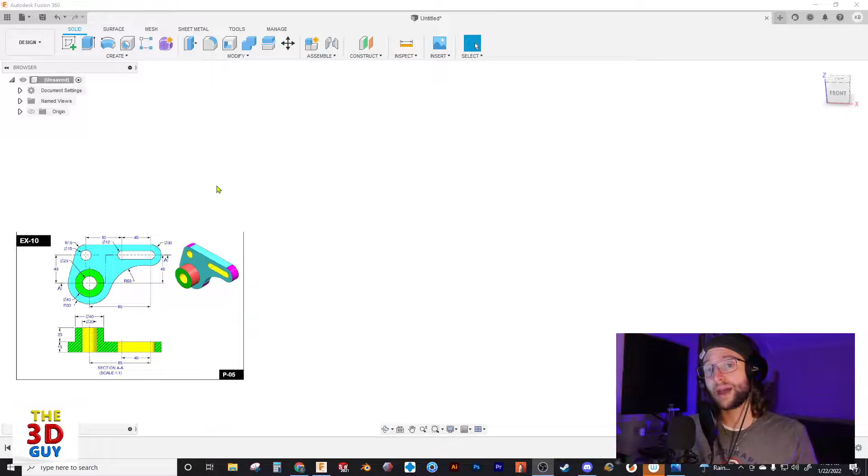Let's just start off from the very basics, which is finding your origin. You always want to be sketching around your origin, based off one of the main features. In this sketch, you can see the green circle, and most of the major measurements are being pulled from that point. So we're going to go into sketch, and I'm going to click front face, that's just my preference, and we're going to go with the circle.

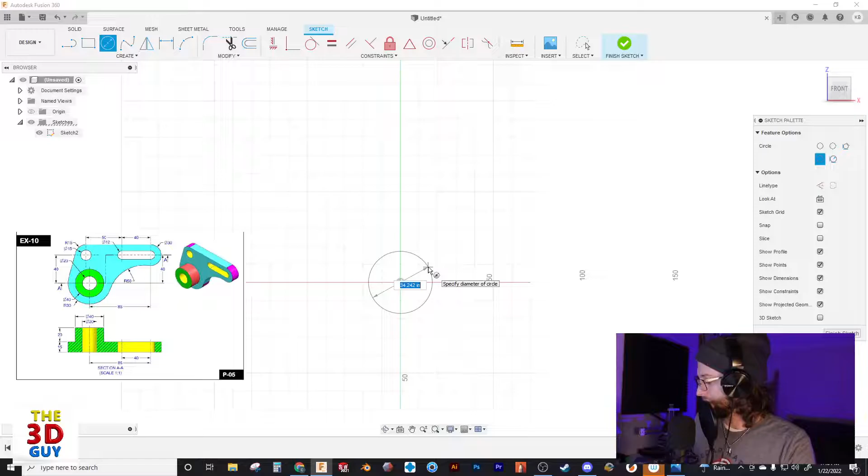One thing I like in Fusion is as you're measuring and sketching things out, you can add your dimensions, and it will count that dimension as a defining dimension. So in this case, let's put in that 20 inches. And it's thinking... there we go. I'm pretty sure all these are actually in centimeters, but it's all scaled, so it doesn't really matter.

We'll do 40. And again, you could also, if you wanted, just click and use your sketch dimensions as well. In some ways I think that's quicker, in some ways I don't. It's really up to you, just more of a preference thing.

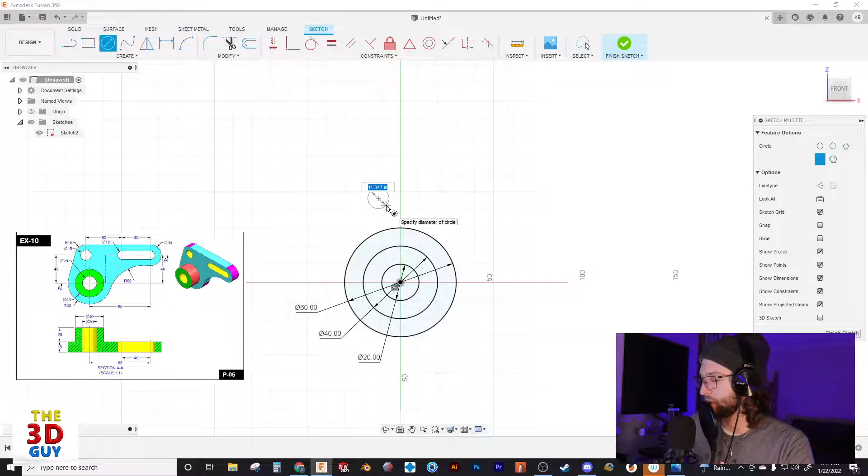All right, so let's move these dimensions out of the way so we can see them and don't get too confused. Then we're just going to add a circle about right here, and we're not going to worry about exactly where it is. This one's 15. Then last, we're going to add a slot.

I'm just going to hover over here and get a reference. And we know that this is 12. All right, next, we have everything put in place.

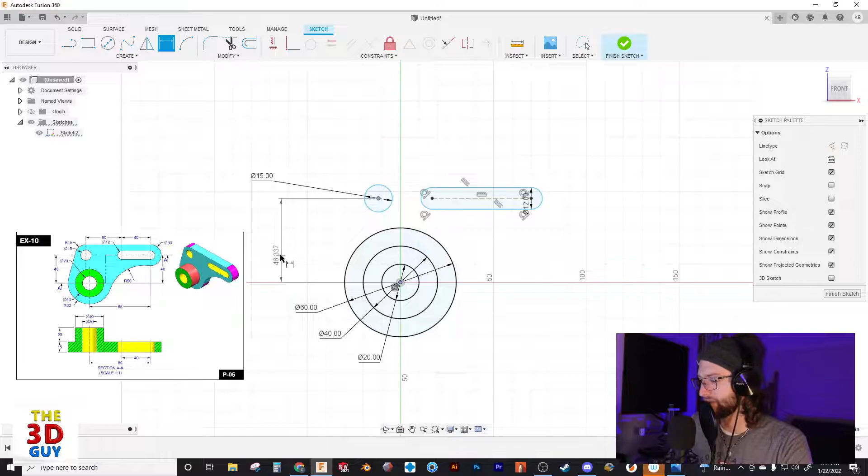Let's get the main measurements in, referencing to that origin. So we know from here to here we have a distance of 40. And we have a distance from here to here of 85. We also need to put in the reference from here to here, which is 50. Then the last one is this length right here, which is 40. Okay, I think that's all the major ones. Oh, missing one more, this is also 40.

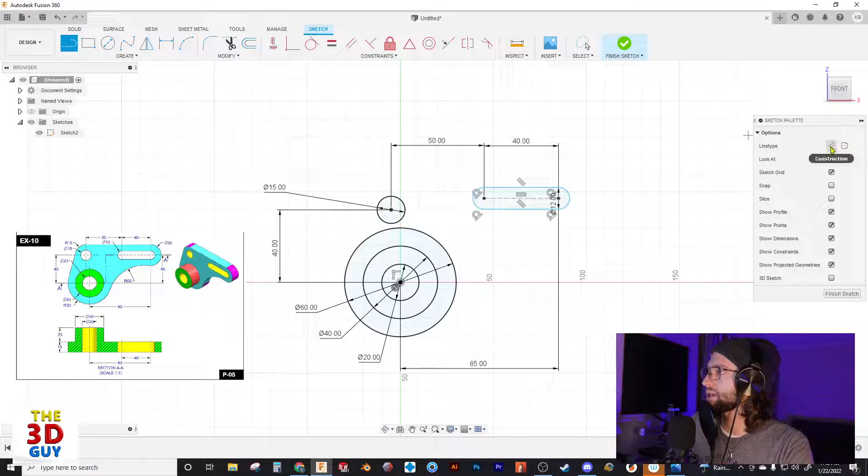Actually, I'm going to do it a different way. I could put this measurement in right here, but what I could also do is put a construction line from here to here, and make this construction line horizontal vertical. So you click on that, and there we go. All of these parts of the sketch have been defined compared to the origin, in reference to the origin.

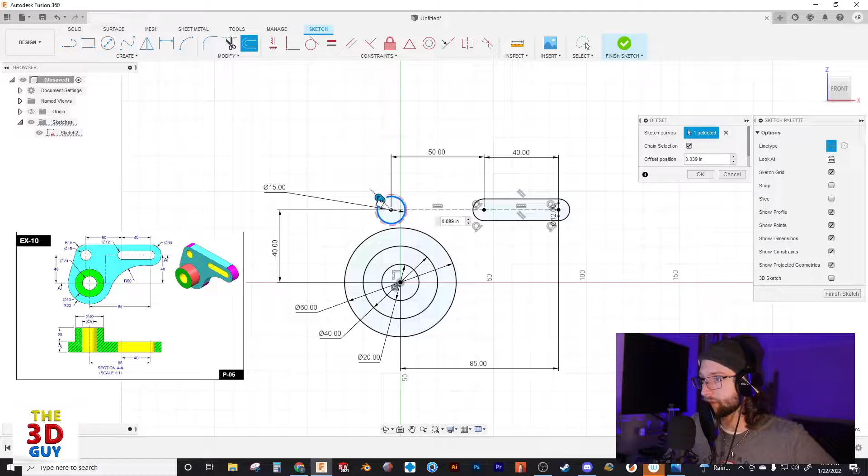Now this is really, really important. What we're going to do from here is create that external shape that goes around the cyan color, I guess is the right word for it. So we're going to do an offset of this circle. We see that the diameter is 30, and so our inner one's 15. We'll turn off the construction. And so that's going to be a 7.5 offset, because that's half on each side.

Now, next what we want to do is we can do one of two things. We can do an offset here, or let's just make another slot. I think that would be easier. Nice thing is we're sharing these points right here, and we want it to be 30. So everything at this point is completely defined, which is nice.

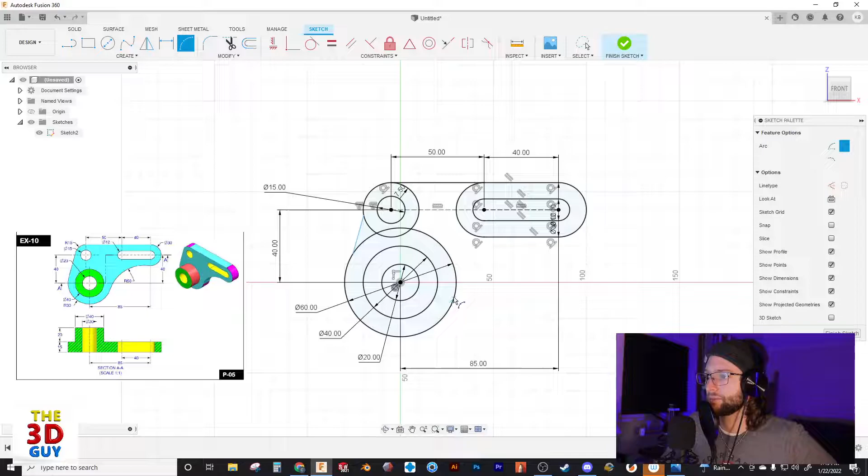And we're going to add a line from here to here, and from just this circle to this circle, and a 3-point arc. As you can see, I'm not really paying attention to where some of these are going. This is not defined, and this is not defined. And so we're going to use the tangent feature. Just click on that, and we'll click on these. And that's already been defined.

And we're going to do the exact same thing with the arc and the circle, and the arc and the line. And there you go. Last thing is to figure out what the radius is for that arc. So sketch dimensions. And we know that this guy is 50. Now a little bit confusing is once your lines do turn all black, this kind of looks like it's extending that line. So I'm just going to move it right there just to make it look a little better. All right, so everything is fully defined.

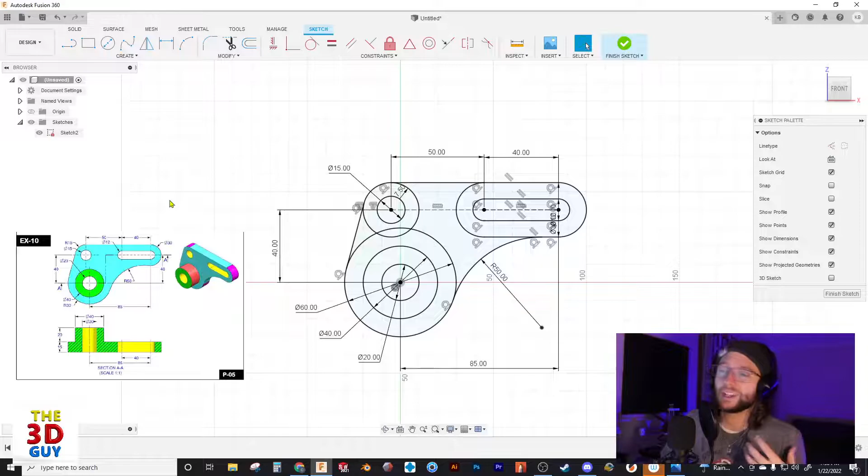At this point, you have two options. One, you can clean it up and get rid of the lines you don't need, because as you can see, there's features here that we really just don't need. Or you can keep them. This is another great thing. Really a preference. I don't like keeping them. I like cleaning them and getting rid of everything. But just for an example, we're going to extrude everything as if we want to keep them.

And so we see that it goes to 15. And then we're going to extrude one more time, bring back that sketch, go -20. And there you go. We have made that piece from that sketch. Now, let's go back though and actually clean up that sketch, because honestly, I can't stand doing this most of the time. So just use the trim tool up here, and we're going to just click, or you can even click and drag to get rid of any of these lines you don't need. And there you go. So it's nice and clean.

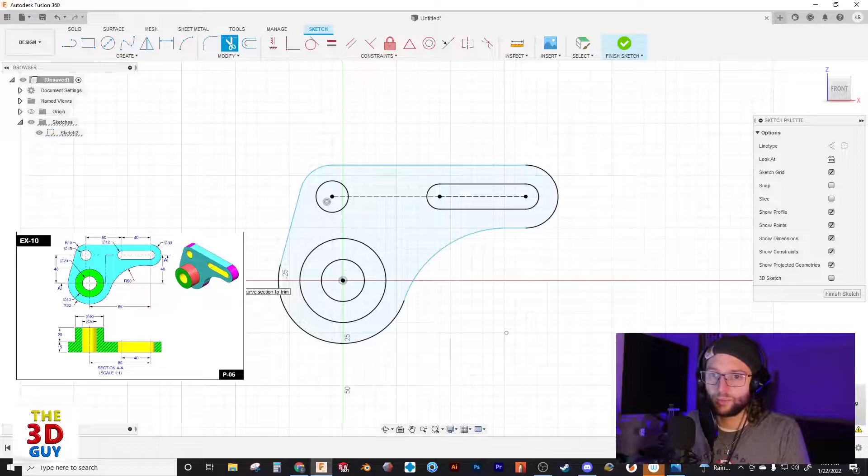Unfortunately, you can see we've lost some of our constraints. So we're going to add some dimensions in some key places. Corner, that helps define that line. I'm going to get out of this sketch and then get back in because the dimensions are not showing. There we go. You can see also there's no defined size there. Even though it says it's constrained, we're going to add a dimension. Oh, didn't like that. All right.

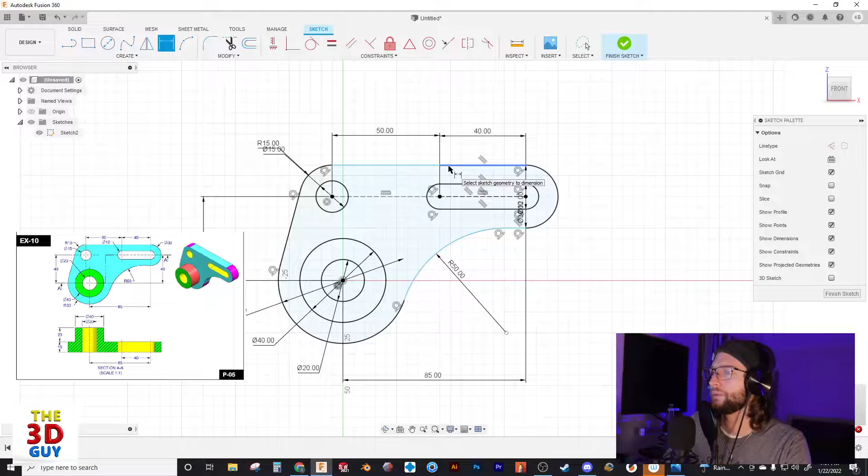So what are we missing? Maybe from here to here? And there's the fun part. I had it constrained just a second ago. All right, so that's constrained. Now these are collinear, so we're actually just going to make these exactly the same. And there we go. And it is defined.

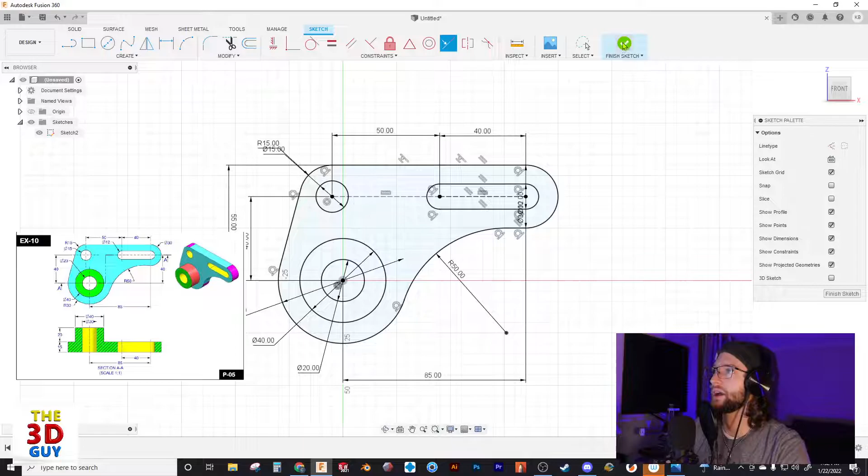So we can finish the sketch there and extrude to 15. And we'll extrude here again to 20. And there you go. We have that shape. So that was just a really, really quick run through. Obviously, there's lots of different ways you could sketch this up, but this is just one method of doing so.